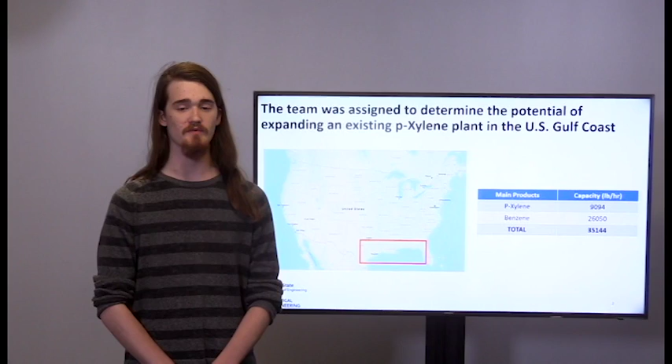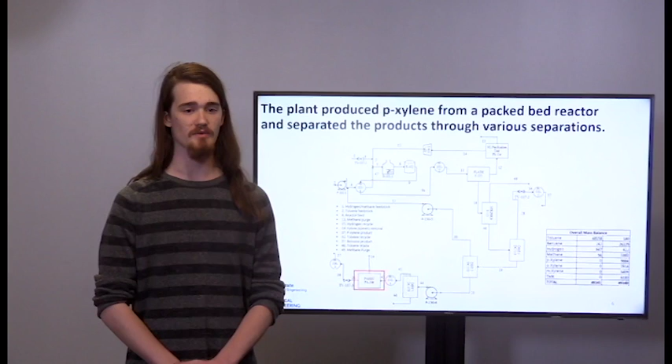After the lights are separated, the heavies are then put into our distillation columns. In the first distillation column, our benzene product is separated from our toluene, mixed xylenes, and TMB. Then, in the second column, our toluene is separated from our mixed xylenes and TMB, the toluene then going back to be recycled into the plant and fed back into our reactor. In the third column, our mixed xylenes are separated from TMB, and following that, the mixed xylenes are then fed into our Parex unit, which separates our paraxylene desired product from our meta and orthoxylene undesired products.

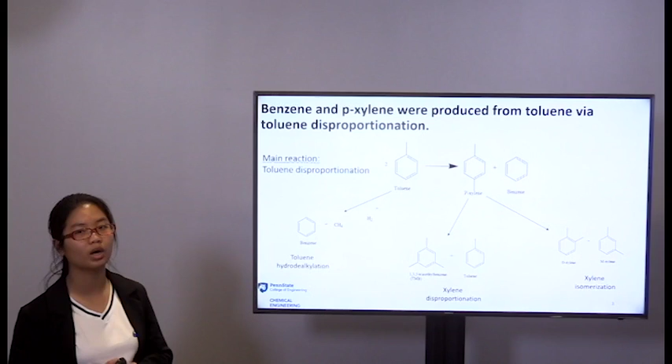So the design process is to create benzene and p-xylene from toluene disproportionation. So our main reaction is going to be toluene coming out with p-xylene and benzene. At the same time, we have three side reactions: toluene hydrodealkylation, xylene disproportionation, and xylene isomerization. So for the first one, toluene hydrodealkylation, it will create benzene and methane from our main reactant, toluene, which can decrease our productivity. Then our product is depleted by xylene disproportionation and isomerization, which will create the undesired xylene isomers, ortho and meta, and TMB, and at the same time toluene. Even though this toluene can potentially go back into our main reaction and create p-xylene, it's still an unexpected side reaction because it will deplete our main product.

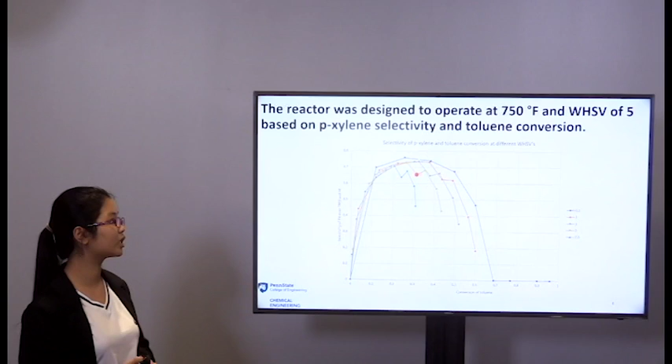The reactor is chosen to operate at 750 Fahrenheit and WHSV of 5 based on p-xylene selectivity and toluene conversion. As you can see on the graph, this is the big red point in which we choose the p-xylene selectivity of around 65% and 31% of toluene conversion, which we think is a good compromise between the two factors to operate our reactor.

Another challenge is separating the lights from the heavies. In our process, in our reactor effluent, we have hydrogen and methane in the mixture with toluene, benzene, mixed xylene, and TMB. Hydrogen and methane are very volatile gases, which makes us have to apply a huge change in pressure and temperature to bring hydrogen and methane into gas phase and separate them from the heavier hydrocarbons.

Upon completion of the model in Aspen Plus, a model verification summary was given to us by Dr. McFadden. It was used to determine which hard and soft specifications were met. Most importantly, the two hard specifications were met, meaning that the paraxylene and the benzene products were 99.9 weight percent pure and could be sold for a profit.

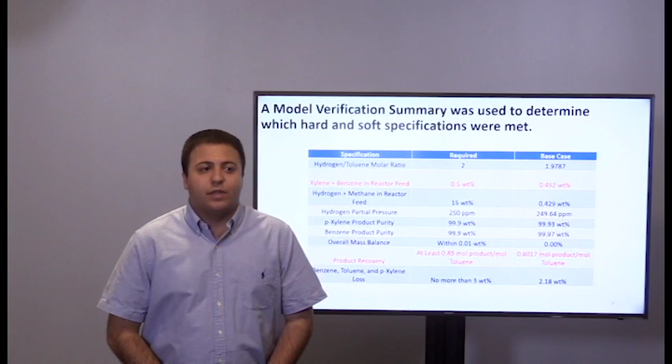The two soft specs that weren't met were the xylene and benzene weight fraction in the reactor feed, which was too low, and the product recovery mole percentage, which was also too low. Potential problems for the xylene and benzene not being high enough are that the conversion and selectivity could be affected for the reactions. Potential problems for the product recovery could be a reduction in total revenue.

Additionally, Professor McFadden also provided us with a Process Definition Rating Index, or PDRI, which was used to assess the state of the project while it was being completed. PDRI went from a score from 0 to 1,000, with 0 being the best. It was measured after gates 3, 4, and 5.

The score after gate 3 was 688. The score after gate 4 was 597. And the final score after gate 5 was 444. The main reason for the decrease from gates 3 to 4 was the fact that the equipment was sized, which erased a lot of uncertainty in the process mechanics section of the PDRI.

And the main reason for the decrease between gates 4 and 5 was the fact that we did an in-depth economic analysis, which we will talk about further along in this, and the fact that process safety was also included in the PFD.

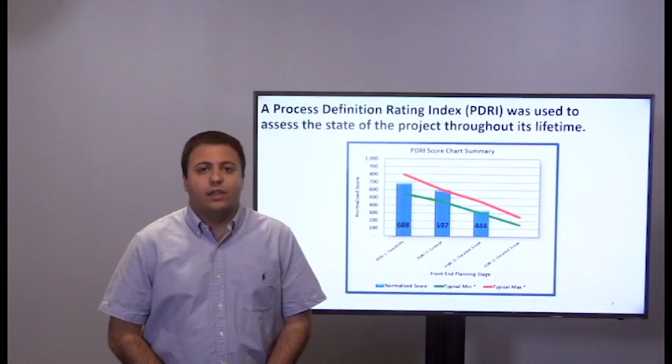When analyzing the cost of this plant, we wanted to analyze a lot of the operating costs, and one of those operating costs that we needed to analyze was the cost of utilities. We were given a range of prices in the problem statement, and we extrapolated those prices off of the current market price of natural gas, which is at $2.18.

From that, we had to use all of these utilities to get the proper energy, temperatures and pressures we needed for each of the systems. The utility that was used the most was the Dowtherm oil, at 71% of our utility usage. The reason this value was so high was because the Dowtherm oil was used in the reboilers of distillation column 5 and distillation column 7, and they needed to vaporize all of the flow rates going through, and the flows going through those distillation columns were very high.

Going along with those distillation columns, we found that we could generate steam from the condensers in each of those distillation columns. Our idea from generating steam was to subsidize the cost of our utilities because we had such a high utility cost. To generate this steam, we had to supply deionized water, and this steam could be sold at 60% of the price of the purchased steam that we bought for our utilities.

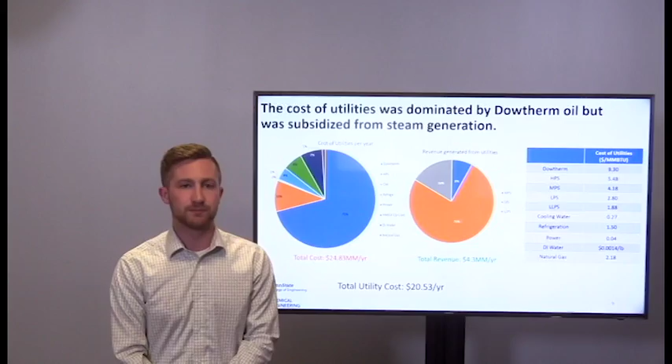The cost of the utilities for our entire plant was $24,800,000 per year, and the revenue that we generated from producing the steam was $4.3 million per year, which, when combined to subsidize the cost of our utilities, gave us a total utility cost of $20.5 million per year. Upon analyzing the cost for the utilities, we wanted to analyze our total plant cost.

We did this by first analyzing the direct cost for each piece of equipment using Aspen Process Economic Analyzer, or ICARUS. Once this software gave us the direct cost for each piece of equipment, we added in the allocated cost, which included the indirect cost and the pipe racks and sewers for each piece of equipment. This led us to a total IBL cost of about $101 million, the majority of which comes from the distillation columns, the heat exchangers, and the specialized separation units.

As you can see, distillation column 5 alone had 19% of the total IBL cost. The Parex and H2 unit accounted for 30%, and the heat exchangers as a whole also accounted for 30% of the total cost. Once the IBL cost was calculated, we analyzed the OBL cost, which was determined to be $8 million. This included site development, storage and handling of material costs, and environmental costs.

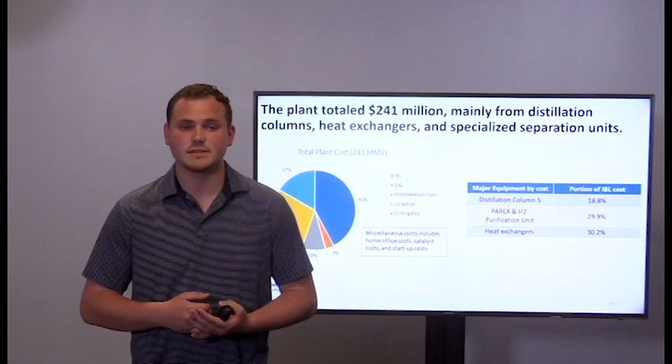With IBL costs and OBL costs calculated, we were able to add in the miscellaneous costs, and with the three, we were able to calculate the expenses from escalation and contingency and get our overall total plant cost of $241 million.

After analyzing the capital costs for the plant, we wanted to analyze the operating costs for the 15-year period that we would be running in. From 2019 to 2021, as you can see, there was zero operating costs because these are the 3 years that the plant is being constructed in. And then from 2021 through 2024, the plant is generally increasing to operating capacity of 100%, which is reached in 2024.

And then as you can see, from 2024 to 2036, it's about a linear increase in operating costs, which can be attributed to inflation. And in 2036, we had a total operating cost of $247 million, 70% of which was raw material cost alone.

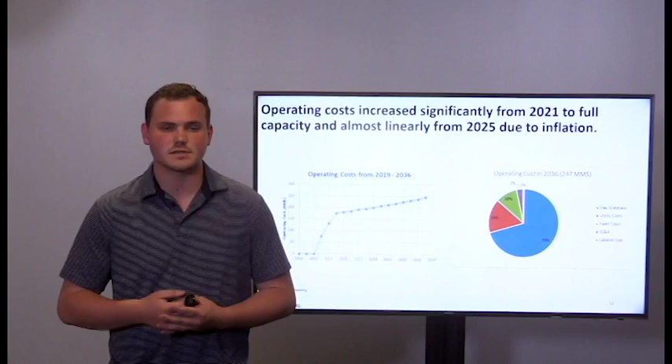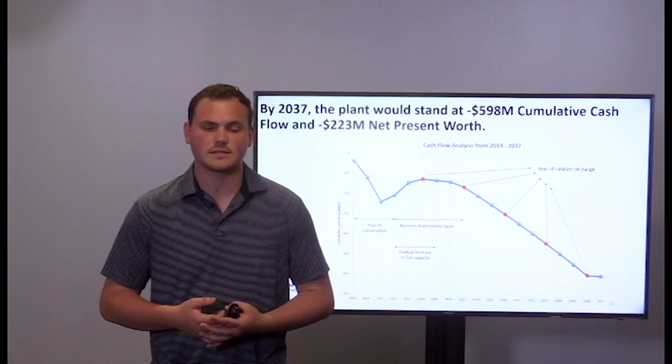After analyzing all the different costs for our plant, we wanted to do a cash flow analysis of it. And as you can see in the diagram, the first 3 years, again, are the years of construction, with 15% of the total capital cost of construction being spent in 2019, 35% being spent in 2020, and the remaining 50% being spent in 2021.

And then from 2021 through 2024, again, the plant gradually increased to full capacity, reaching that in 2024, where the first year of catalyst recharge also took place, which must be done every 3 years to ensure that the plant runs properly. Also, between 2022 and 2027, the plant ran at a non-zero depreciation basis, increasing expenses and costs for the plant. By 2037, the plant stands at negative $598 million in cumulative cash flow and a net present worth of negative $223 million.

In order to test the validity of our process, we needed to run 2 different alternative design studies. These design studies included various units and different ways to purify your streams or things along that nature. So in one design process that we came up with, we decided to add a 4th distillation column in our TMB waste stream in order to purify that stream so we could sell it to make a profit off of it.

This raises the question: why wouldn't we just optimize distillation column 7 to get a more pure TMB stream instead of adding a 4th one to get the same results? Upon analysis of doing that for distillation column 7, we found that it would cost way too much money to run that distillation column, and the size of that distillation column would be way too unsafe to run at. So we decided that adding a 4th distillation column to purify TMB would be the best choice.

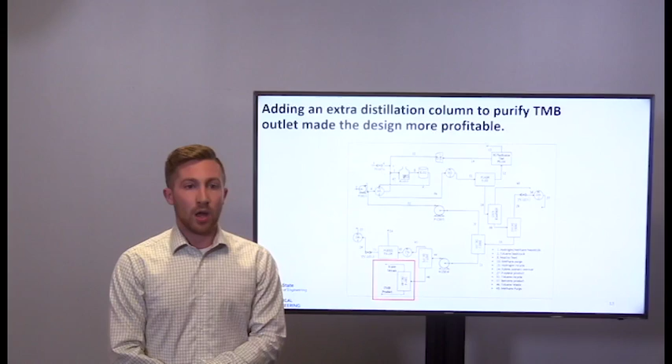So in order to test the validity of this column, we did an in-depth cost analysis of this. The cost analysis for this case we based off of our initial base case, because we were adding the distillation column so far downstream, it did not affect any of the upstream values. So all of the cost analysis and the utilities and the capital costs of everything else that we had done before for our plant would be the same for this, but all we needed to do was take the cost of the utilities and the capital cost of the column itself.

This raises the question, if it didn't affect any of that and it makes our stream more profitable, why wouldn't we just do that as our base case? But due to time constraints and meeting deadlines, we cannot do that. But we decided that further along the project it could be implemented after construction of the plant itself.

Looking at values of this, we noticed that the utility cost of running this distillation column was only $200,000 more than the total utilities of the plant itself. This is also due to what I had mentioned before with the steam generation, because we also generated steam from the condenser in that distillation column. The capital costs, after putting it in with our other capital costs, we noticed that it was only a $1 million increase in the capital cost.

And then running that through the cash flow analysis, we looked at the 15-year revenue that this distillation column would generate us, and we get $201 million versus $186 million. This brings us to the net present worth of our plant, which for our base case was negative $223 million, but with this distillation column, it dropped us to negative $187 million per year.

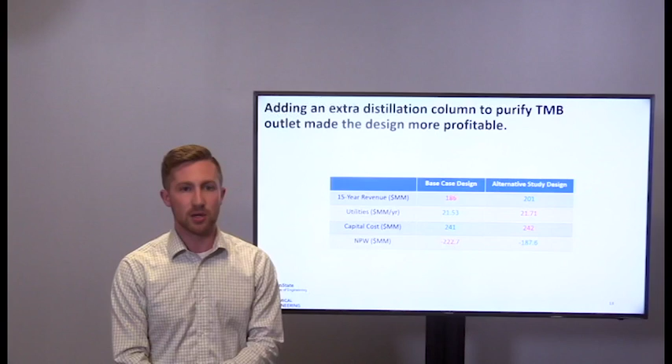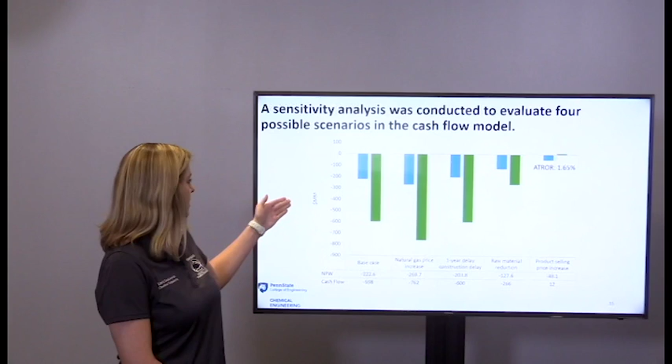So a sensitivity analysis was run to evaluate 4 different scenarios, and then they were compared to our base case. So as Mason said earlier, our net present worth was negative $223 million, and our cash flow is negative $598 million. So you can see on our screen, the cash flow is here in green, and the net present worth are your blue bars. So our first case was an increase in natural gas price.

So the natural gas price that we used before was $2.18. Now this is historically low. So we averaged the prices over the past 20 years to get a value of $4.29. So with this increase in natural gas price, we saw a cash flow of negative $762 million and a net present worth of negative $270 million.

So the next case that we evaluated was a 1-year delay in construction. And with this, we actually saw an improvement in our net present worth with negative $203.8 million, which was very comparable to our base case. And then with our cash flow, we saw a value of negative $600 million.

So next we had our raw material reduction, which was where we reduced our raw material prices of hydrogen and toluene by 20%. So with this, we saw a net present worth of negative $127.6 million and a cash flow of negative $266 million.

And then finally, the only case that we experienced an actual return on was to increase our product selling prices. Now for this, our p-xylene price was increased by a factor of 1.3, and our benzene selling price was increased by a factor of 1.4. So we still had a net present worth at negative $48.1 million, but our cash flow is actually positive at $12 million, giving us a rate of return of 1.65%.

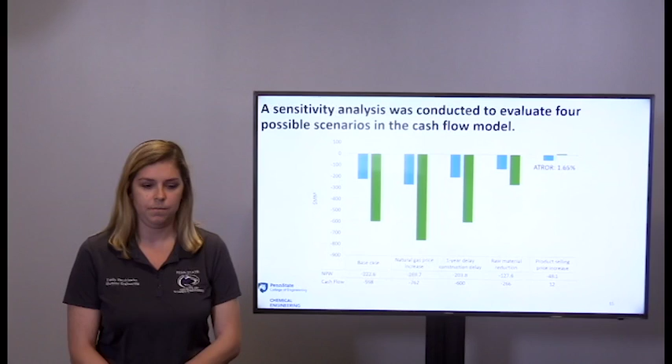So finally, our team was able to complete all of the tasks in its design of the actual plant. So first, a base case design was established. With this, we had a reactor, a flash separator, a stripper, and 3 distillation columns. The reactor was scaled up from pilot plant data given to us by Nitline Chemicals with our zeolite catalyst.

We met all hard specifications with our material being in balance by less than 0.01%, and with both products being in spec, with a purity higher than 99.9%. Next, we figured out the total energy usage of our plant, and that was actually negative 11 million BTU. And then we also calculated our utilities, which came to a cost of 8.65 cents per pound produced from our plant.

Next, we used the PDRI throughout our entire process, and finally, as Joe mentioned before, our final score was 444, which was well within the bounds of what we needed. And then we considered 2 alternative cases, and each one was adding a distillation column. And the one evaluated financially was the one to purify a TMB stream, giving us a third product that was sellable. And then finally, plant economics were evaluated, again, for our base case and for a few sensitivity analyses.

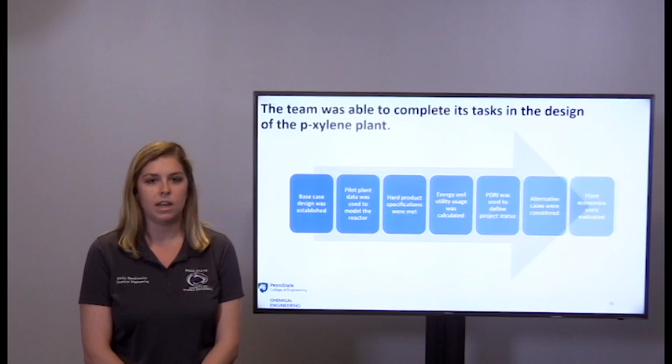For our base case, again, our cash flow was negative $598 million, and our net present worth was negative $223 million. So as a team, we would recommend that this plant not be built in its current state, but we do have several suggestions for going forward. So first, we think that we can improve conversion by probably developing another catalyst.

So in its current state, the zeolite catalyst does not have high enough p-xylene selectivity or toluene conversion. So with this, we think that we can definitely improve the selectivity and conversion, giving us an easier separation downstream, so that will also decrease our operating costs. So in our current state, because our separations are so difficult, we do have rather high operating costs. But again, with a better selectivity and conversion, we think that those will dramatically decrease.

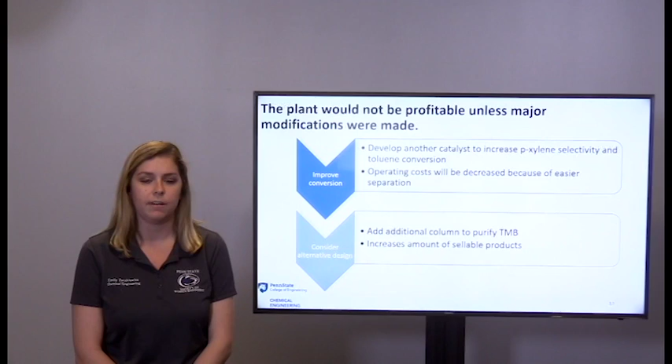And then finally, we can consider our alternative design. So adding the third column to purify TMB gives us a third product to sell. And again, having this additional product will just increase the amount of product that we have, which will increase our economics. So again, in its current state, we would not recommend that this plant be built as is, but with several recommendations from our team going forward, we think that this plant has a promising future.